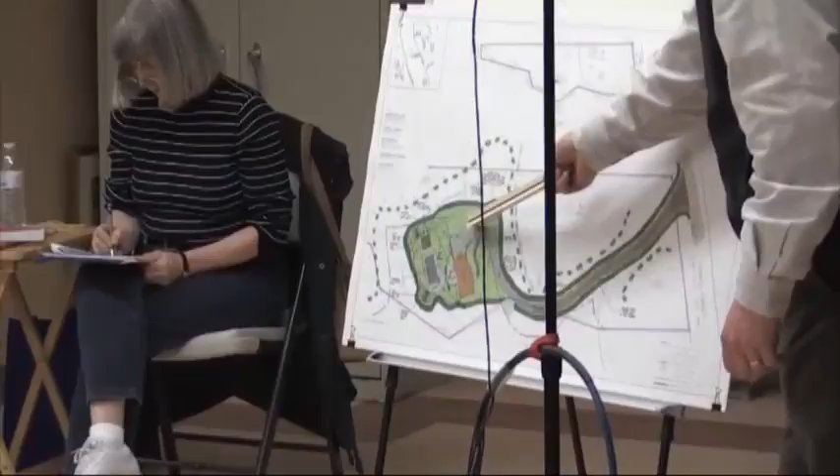If you see this, it's kind of ghosted here - this is Old Forest Street, so a portion of this used to be the road. There were all sorts of logging roads throughout here too. This actually extended further, and part of the violation was they relocated the driveway to here and fixed all this. That's why I asked Greg to put plants back in where the shed was, because that was a restoration area that was previously planted.

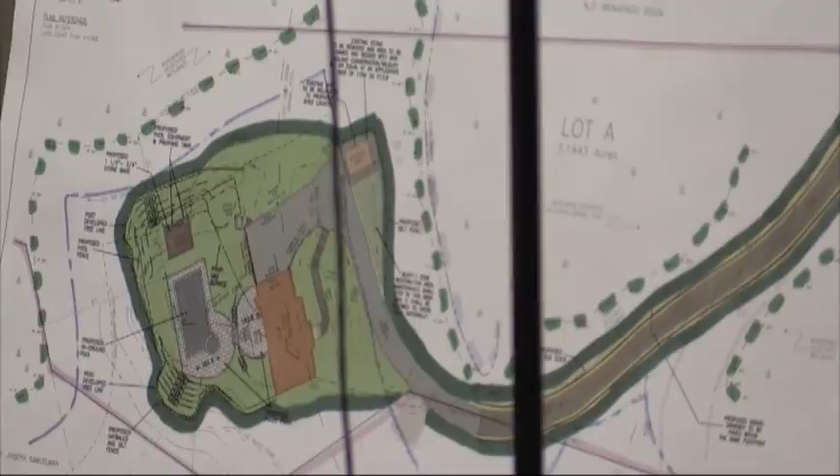The reason why, to my memory, the septic was on one property, and I think they have a well from the other property on this property, was just because it was so tight and they were so restricted with what they could do. They had to do all this common ownership to try to build - there's two homes there, and a lot line change somewhere in the process too. It's one of the things that kept us away from buying it. Part of it was land court. It was a mess, a nightmare just reading through the file.

Those are my thoughts. They're both on wells - this well is right here for this house. All set, thank you. Al? Good. Doug?

Yeah, I have a few questions. The propane tank that is proposed, is that an above-ground tank or below? Above ground. I've been told since the plan was designed that we need to stay a certain distance from the pool equipment with the propane tank - I think it's 10 feet. So we're gonna have to relocate that slightly, and they're considering a vault to put it underground somewhere on the property.

So you're gonna be changing the plans? Yep. My other question was, where does the truck that refills the propane tank park? Right now the tank is behind the house here, it's not shown on the plan, but they currently have a propane tank behind the house, and the truck parks in the driveway and fills it from there. The original thought was to tuck it further away on the other side of the house, but they talked to the propane company and that would be a bit more of a challenge - they would have needed a different type of truck to fill that tank in that location, so getting it closer to the driveway was preferred by the gas company.

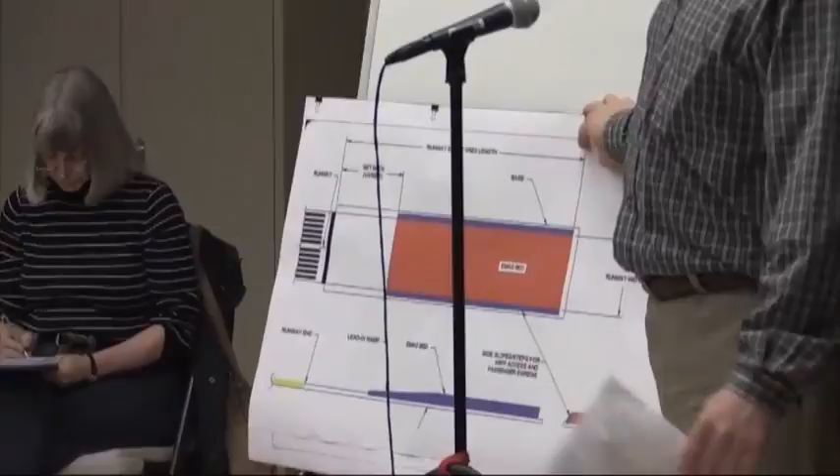At a B2 runway, which is a fairly low-level airport reference code, we need a much smaller safety area. As is in the notice of intent, in the current plans we were able to fit that 240-foot length by 120-foot width at the end of runway 32, but it encroached within the 25-foot bylaw buffer. So we wanted to see if an EMAS application here at the runway 32 end might allow for shortening that distance and actually provide better buffer from the wetlands.

So let me go over the basic components of an EMAS bed. Here's your runway end. There's always a lead-in before you start your concrete blocks - there's always a lead-in length.

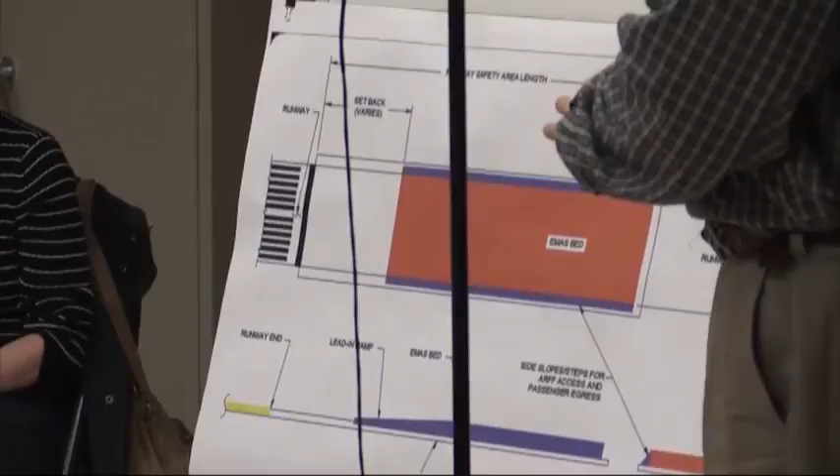That lead-in length for a C or D type airport, where we have significant jet blast which can damage the blocks, can actually be pretty significant before you even get to the EMAS bed. The narrowest you can have is about 35 feet. Since we don't have jet blast associated with this particular runway end, we put the minimum 35-foot lead-in off of the runway end.

The bed itself is designed based upon a design aircraft. The complication here is that EMAS design is typically for planes with a minimum full capacity load of 12,500 pound single wheel loading. Our design aircraft for the crosswind runway at Lawrence doesn't weigh that much. So we're already in a bit of a hassle, because EMAS really isn't designed for the light aircraft that is the design aircraft for this runway. So what we did was just assume the minimum length EMAS bed acceptable in the regulations to apply to our design aircraft for the crosswind runway at Lawrence.

So there's the lead-in area, and then there is a stepped block. It goes up - there's a slope up on the blocks, and then it can go down at the end.

It is set on a bed of pavement. Hot mix asphalt is typically used, so it's not set right on ground surface or compacted gravel or anything like that. There is a typical 6-inch layer of hot mix asphalt underlaying your EMAS bed.

To the sides, shown in cross section and purple in the plan view, we need steps going up to the EMAS bed because its whole purpose is to contain an aircraft accident. We need ways for safety personnel to get up to that accident should the EMAS bed be used. Surrounding the entire EMAS bed is a series of steps, typically two-foot steps, which adds about 8 feet in width to the entire system.

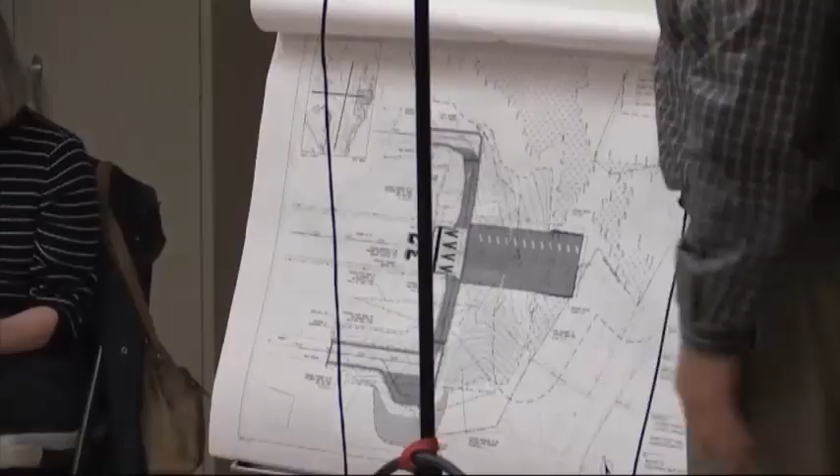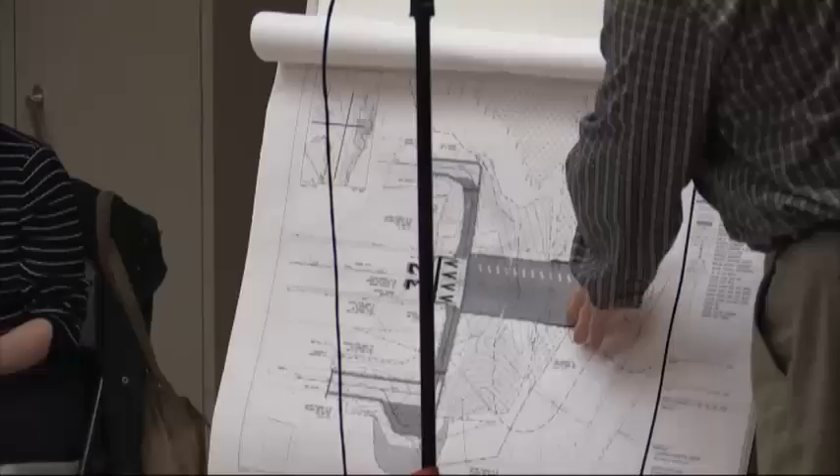The EMAS bed itself is 35 feet plus 285 feet worth of actual concrete block bed. The width has to be 100 feet for the blocks, but then we have steps on either side, which add about 4 feet to each side, so 8 feet total. Then we have to have 10 feet of pavement - the bed itself has to extend out beyond the EMAS bed as well, just for support vehicles, so they have something to drive on next to the EMAS bed. So that gives us about a 128-foot width.

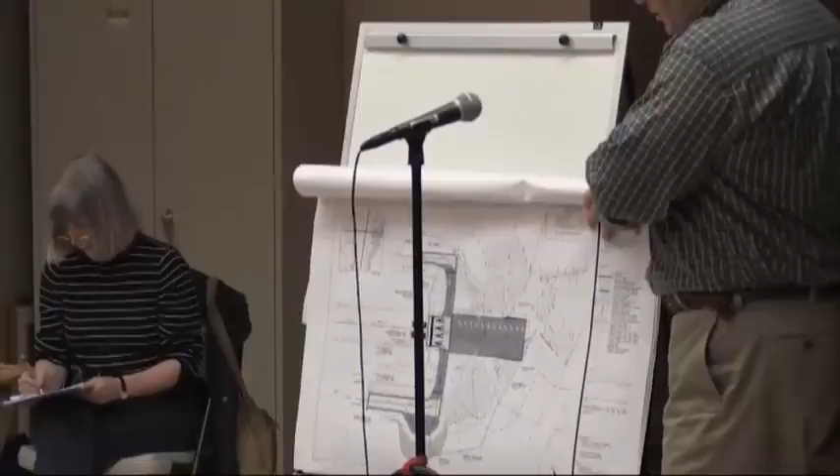So you can see in this situation, for a B2 runway, any B2 runway, your minimum size EMAS bed is actually larger than your typical soil and turf runway safety area. It would be a very rare situation - and I don't know of any, and I know there's none in Massachusetts or the Northeast - where you would find an EMAS bed for a B runway.

We have them for C runways in New England, and I know of 2 D runways, again within about a 50-mile radius of here, that have them. Worcester Airport has one for their crosswind runway, and Logan certainly has a high-level EMAS bed there as well.

In fact, are they working on a second at Logan? They might be - there's one they're doing, and I think there's one they're actually planning as well. There are two in operation, and there's actually a third planning. They were also in the planning stage for Hanscom - trying to do one at the runway 23 end, and I was actually involved in that. They were able to do a standard safety area for Hanscom on their crosswind anyway.

Unfortunately, it's the expense that really gets you on EMAS systems. Not only does it need to be replaced every 20 years, but it needs a specialized snow blower - you can't plow it with a vehicle. You have to get up there with what can be one of those one-man riding snow blowers, but it's a very specialized snow blower sold by the EMAS company that needs to be purchased along with the EMAS, so it cannot be plowed by the regular maintenance equipment at the airport. So there's a lot of things inherent to EMAS beds which make them tricky and expensive.

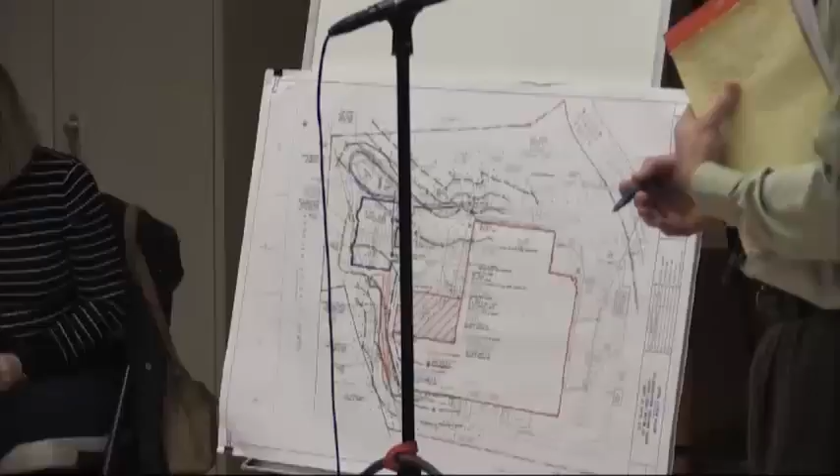The planning board was actually all set with the project. The main reason they didn't close is they wanted to wait to see if conservation had any additional items, since we didn't have the ability to appear back before the commission before our last meeting with planning. But what they did is leave it open — we stopped the fence right here, because we don't feel there was a need for any buffering in this direction. There were no big issues from any of the abutters on the other side of Route 125.

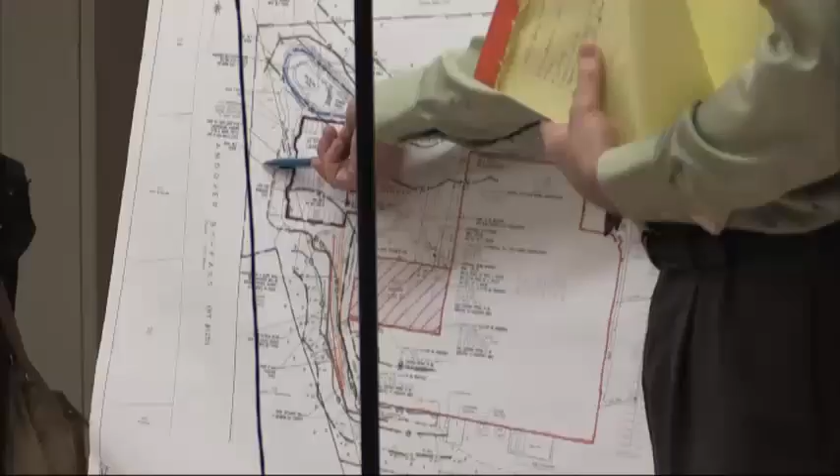But the planning board brought up a point: if a vehicle is coming up into this parking lot at night, could somebody traveling on 125 start seeing lights and think someone is going to pop out of the woods onto 125? So they're putting a condition in their approval that within 6 months to a year, they want to revisit to make sure there are no issues. The way we'd address that is by continuing the fence across the backside, or some sort of vegetated buffer, to just block the headlights from vehicles coming up in this direction.

With this current design, the board is moving forward with approving it as is. If we end up having to extend this fence, we would have to come back to the commission. A portion of that fence would be in the buffer zone, but it would be in an area that's already proposed to be cleared, so we wouldn't be doing any more clearing — just the construction of a fence in the buffer zone.

The one other issue the planning board had is that we requested a special permit for the reduction in parking. My understanding is that for other projects that requested this relief, they've gone back to the site 6 months to a year later to see if it's working and whether more parking is needed. If we had to do that, one of the things we would do is continue the parking lot back into Andover — again, the reason we didn't do it originally was there was no need for it.

The facility's been functioning fine with the parking they have. They feel they can function fine, and based on the numbers, they should be able to function fine with the reduction that's allowed in the parking. But again, if we do have to add it, it'll be off in this direction, and we'd have to come back to the commission to revise it. Most likely the detention basin would just get a little larger to accommodate the additional pavement. All the setbacks would still be maintained, and it would still meet your wetlands bylaw and regulations.